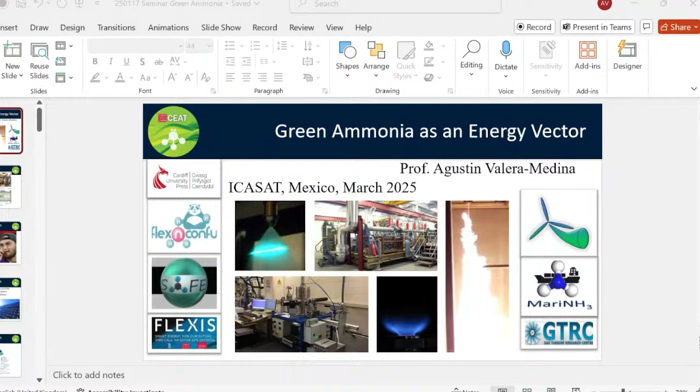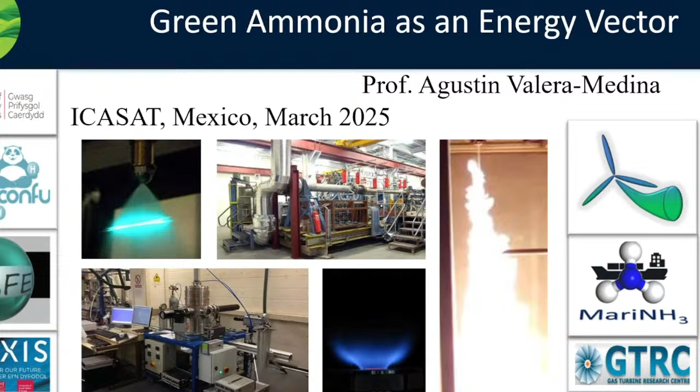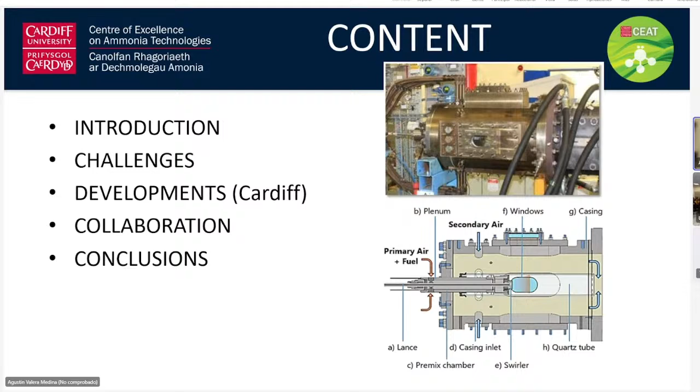Okay, perfect. So I'll start the presentation, and I'll be talking about green ammonia as an energy vector. As mentioned previously in my biography, I've been working a lot on this subject, and we have found that it's a very interesting area that, as mentioned to Gabby, who politely and nicely contacted me a few weeks ago to support this venture, this idea of having these seminars. I told her that it was an interesting concept at the time that we started working on it, and eventually just progressing to something that has reached all the corners of the planet. So as part of the content, I'll be mentioning the introduction, the challenges that we face, developments that we have been doing on the subject, and then collaborations with some conclusions regarding the use of this interesting chemical for its power and energy associates.

So this is in a nutshell some of my biography. For those that want to read, go ahead. But the idea is that I can use this time to mention something about the subject on its own and how it reached our university at the end of 2013, before Christmas. We had some people from Siemens coming over and saying, we want to burn ammonia. We didn't understand what they were trying to do. We've been working on combustion in my university, Cardiff, for around 40 years now. And we have some pedigree on combustion systems, but we never thought about burning ammonia.

And when I started digging out some information about the use of this chemical, I found out that at some point in the last century, some companies and institutions were actually trying to burn ammonia and progress from fossil fuels to net zero vectors like this one. But interestingly, one of the main problems was that the emissions, the lack of efficiencies, and some other factors led to the stop and finish of these programs. It resumed at the beginning of 2000, and by 2010-12, the Japanese started working on this concept, and now we have institutions all across the world working on it.

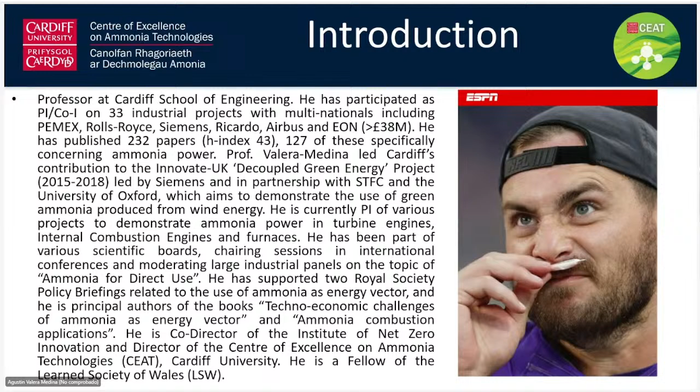We know about industries, large clusters actually trying to use it in China, Japan, South Korea. The marine industry is moving in that direction, so it's forecast now that 1/3 of all marine vessels worldwide in the next 15 years will be operating with ammonia, and in the same way turbines and other large power systems, medium-sized and small-scale units will be using the vector in different locations. So again, very promising, and it was just a combination between luck and the hard work that we have put on this area that has allowed us to reach this level of expertise.

So with that, everything comes down to why we want to use ammonia, and it goes to then using these renewable sources that we have been talking about for the last 20, 30 years. Those include marine, wind, and solar. And as probably all of you know, we have lots of issues regarding intermittency.

Just in the UK, we had around 5 years ago this main issue that because we were running that particular day at around 48% wind power, then the wind stopped. There were some issues regarding weather in the north of Scotland, and from there we just stopped producing that energy. So around 1 million people lost power during those couple of days.

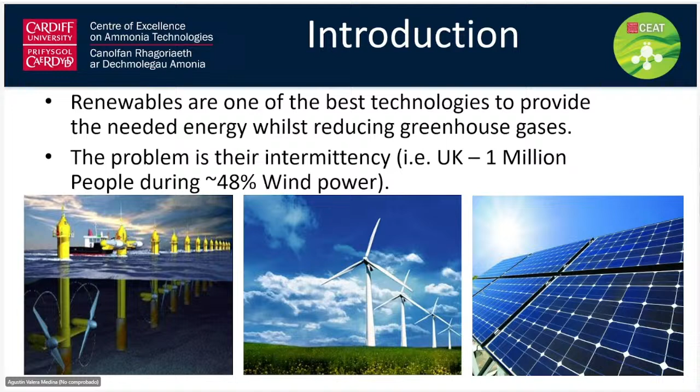Similarly, something happened in Australia where they were just fitting and charging some batteries in the south region of the country, and eventually they suffered a problem with the batteries and also the feeding of that energy, and an entire city lost its power for a few hours. Again, this raises the importance of having some way of actually storing some of that energy.

This is a graph that was produced a few years back by Siemens, and what they did was to evaluate different vectors, different methods to actually store energy. Probably you've seen many, like those related to batteries. We have flywheel storage, supercapacitors that at the time were just moving into early commercial stages, pumped hydro, and some thermomechanical storage as well, like compressed air in caves and some other locations.

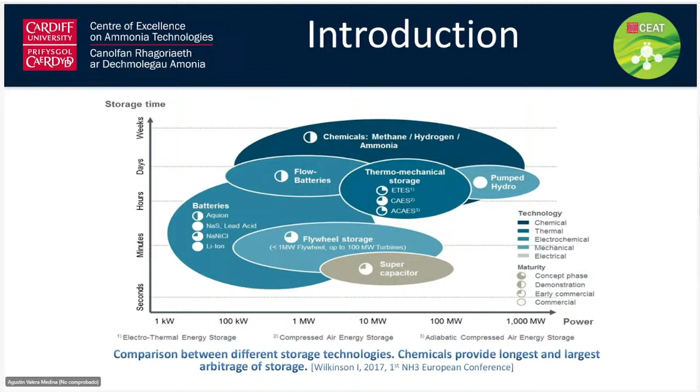But the one that is very promising, that we have been using for centuries, even millennia, and has always been on our agenda, is chemicals. With that, we have natural gas, mainly methane, 90%, hydrogen, which has been in the scope of research over the last 30 years, and then ammonia, which we've been looking into for around 10, 12 years, with a lot of scope and a lot of industrial push to get it going.

So this is an interesting map and also some techno-economic analysis performed by the Hydrogen Council. What they're concerned about is how hydrogen could be moved around from locations where we will have massive production of renewable energy, tapping into it to produce hydrogen. And what do we do? We can then move it to those locations where we're going to be needing it and using it the most. So they are putting some cases like Chile to the US, Saudi Arabia to the European Union,

and Australia to Japan. Along those lines, you can see on the left-hand side that we have all these photovoltaic and wind resources spread all around the globe, compared to the natural gas resources that are very localized and now are in depletion mode.

So with that, the Hydrogen Council said, if we have a place like Chile where we're going to produce lots of wind and solar power, then hydrogen being produced and delivered to the US, if we compare ammonia, liquefied hydrogen, and liquid organic hydrogen carriers, we need to analyze the cost from clean production to the final ports where we're going to be distributing this chemical. You can see on the right-hand side that the cost at port is fairly the same between ammonia, liquefied hydrogen, and liquid organic hydrogen carriers.

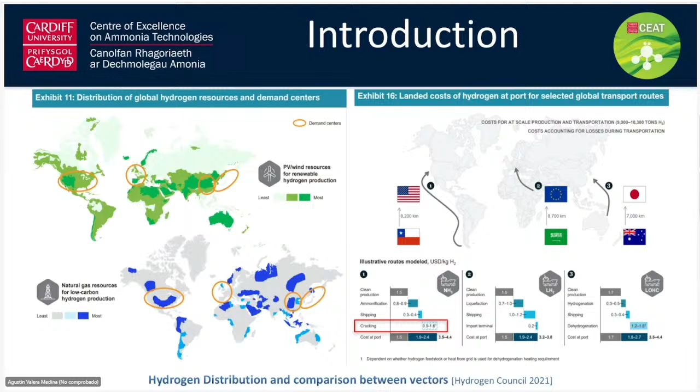But there's one catch, because with ammonia, cracking is almost a third of that cost. So what that means is that if we can reduce the cracking of the ammonia, we will have the best and most economic solution to deliver all that energy, making ammonia a perfect case for long distance distribution, for long storage, and also, as you'll see, heavy duty workloads. So with that, ammonia can be recovered from renewable energies.

We can also use stranded resources like islands or very far away off-grid locations, enable the use of waste streams because we can recover things from farms or processes that have lots of nitrogen and ammonia in them, allow storage of vast amounts of energy, and it can be much cheaper than the use of hydrogen as we know it right now. It can be used to produce energy in these isolated locations, and be employed not only as a fertilizer, which is the main use of ammonia, but also as a fuel.

And one of the interesting things is that the hydrogen content inside the ammonia molecule is actually more than the one that you will have in the hydrogen molecule.

And the reason is that you've got 3 atoms of hydrogen in the ammonia molecule, therefore around 20 to 35% more hydrogen in ammonia than in hydrogen itself. And there's a massive infrastructure with a market that is almost worth 200 billion euros per year, because it's the second most commercialized chemical worldwide. And that makes ammonia a fantastic case to distribute that hydrogen and then provide for some

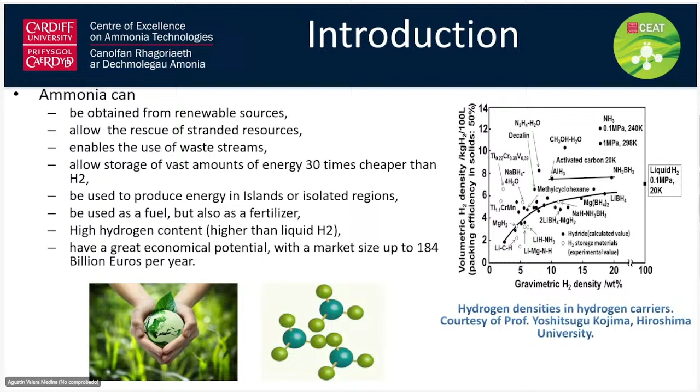of that energy. One of the questions that I always get is, okay, so we are going to produce all this ammonia, but then what is going to happen with the fertilizers that we're now producing? Are they going to get compromised in the production of this ammonia energy? Well, different companies are now looking into different technologies and the transition through all these different generations of systems.

The main challenge and problem with that is that we are producing lots of CO2 that eventually is just dumped into the atmosphere, contributing between 3 to 4% of the total human CO2 production that civilization is producing nowadays. So it's a massive contributor to climate change.

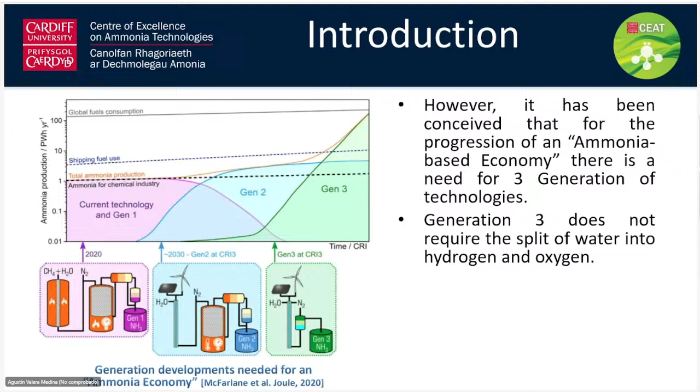Therefore, companies are looking into generation 2, which appears in this graph in blue, and is using renewable energy to produce via electrolysis the hydrogen that will then mix with the nitrogen from the atmosphere, then put it into these reactors. And then one that has the potential of actually changing the world, and probably the next Nobel Prize, would be Generation 3.

Generation 3 is a combination of surface catalysis and materials in cells, fuel cells that are going to use the renewable energy to mix water and nitrogen straight from the air, so without having to separate it, and then finally producing the ammonia.

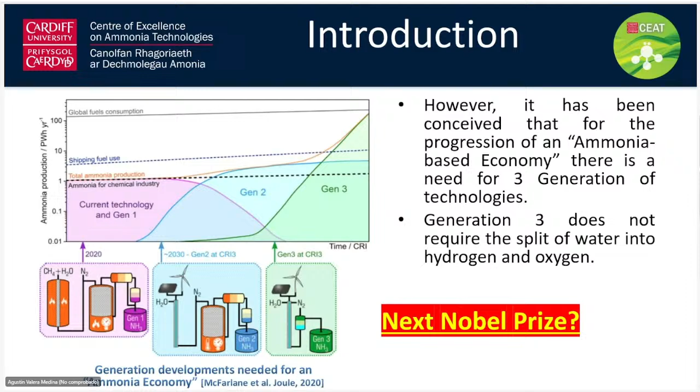If that happens at some point in the near or long future, what that means is that anyone that has renewable energy, which, as we've seen in the previous map, is almost every corner of the planet, and water and air available, will be able to store that energy in the form of ammonia. So therefore, it will drastically change the whole concept of how we produce, store, and distribute energy worldwide.

Another interesting way to produce that ammonia is called pink ammonia production, which is looking into the use of thorium reactors via nuclear energy. And this is an interesting concept because these nuclear reactors are very small, the size of a classroom. And with that, they intend to produce around 100 megawatts per container, and by piling them up, we'll get gigawatts of power that will produce lots of heat that can be employed for ammonia.

Ammonia that will be distributed via shipping and containers, and that way decentralize the production of energy in these isolated locations. So a combination of nuclear and ammonia is now in the cards of every company that is thinking about producing ammonia for the near future.

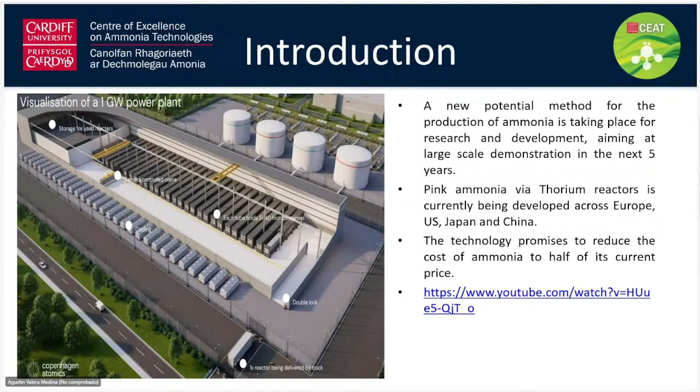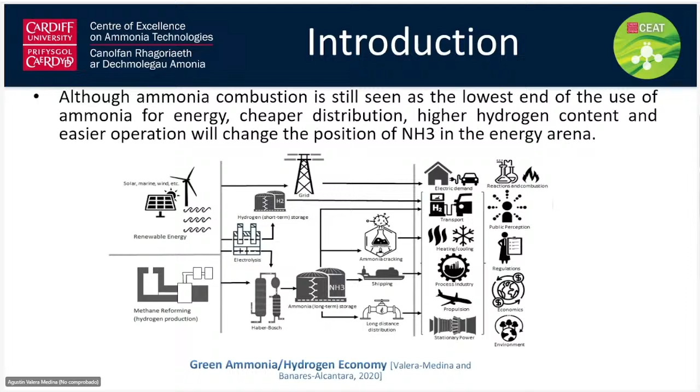The only one that we've got at the moment is one from the IMO, which is a technical specification and some ideas to start using it in the shipping industry. Then the economics involved with that, and finally the environmental aspects that will come, thus dumping all the water and nitrogen from the process that we're producing, as well as with the combustion or use of ammonia.

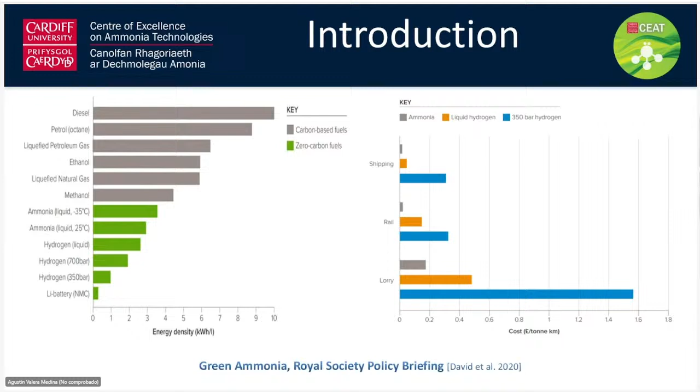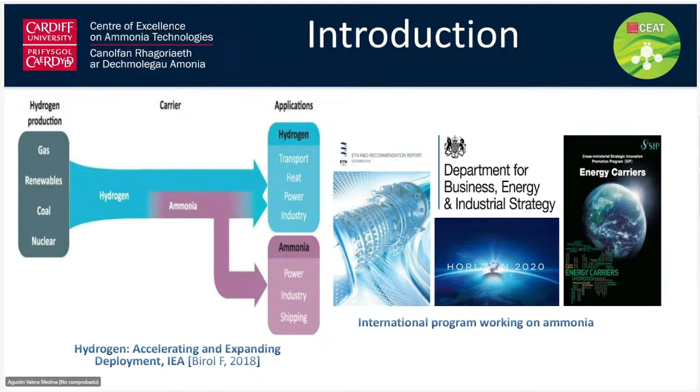And that was something that the International Energy Agency realized in 2018. So they put ammonia as part of the energy applications that the chemical could provide for the power industry and shipping. And then after that, lots of different institutions and governmental bodies across Europe, Asia, and also here, for example, in the UK, started realizing the potential of using ammonia, with many funds and large programs that are now running at different scales.

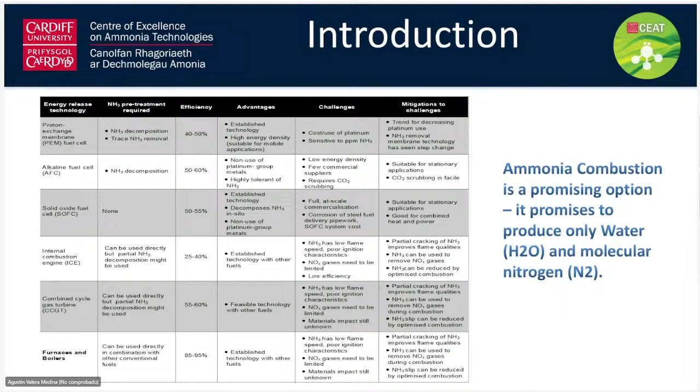So with that, ammonia can be used in all these systems that you see here, from fuel cells in PEM, alkaline or solid oxide, internal combustion engines, combined cycles using gas turbines and some other bottoming systems, and then furnaces and boilers, at all these different efficiencies, running from 25-40 to around 85-95% that you can recover from the use of the chemical. All have challenges, all require some mitigation, some advanced research and innovation in terms of engineering and technology, but all are feasible and possible at their capacities, with lots of research going on now in this arena.

And in terms of what is going on in different locations, particularly Mexico, a recent report produced by Ricardo and EDF, the Environmental Defense Fund, looked into the potential of Mexico to actually become one of these ammonia suppliers worldwide that can provide the fuel itself. And what they found was that Mexico has an amazing potential because of its ports and its renewable energy sources to produce all that amount of chemical and then supply places like the US with ammonia from renewable sources.

Similarly, and not that long ago, just 3-4 weeks ago, we heard in the news that the Istmo de Tehuantepec was receiving a new company called Helax, and what they are going to do is produce ammonia for fueling and shipping applications. So now companies are establishing themselves in Mexico to tap into renewable sources produced in the region, and then with that produce ammonia and hydrogen that will be used for shipping and power applications. So this is coming to Mexico and is coming across all the world, especially Asia, Japan, China, South Korea, that are leading this subject very strongly to decarbonize their systems.

So we got lots of challenges. We have identified 4 that are particular to these technologies. First, the synthesis of carbon-free ammonia. The second one is production of energy at power utility scale. We have public acceptance, which is a major issue that requires safe regulations and community engagement. And then finally, the economics, which need to be right before we can start tapping and producing all this ammonia for fueling applications.

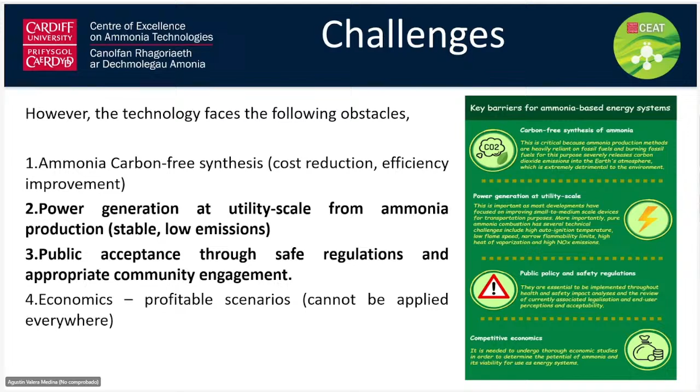So along those lines, some of the things and developments that we have done, we focus, as you've seen in my biography, on the area of combustion, looking into what would happen if we change some ammonia by hydrogen or hydrogen by ammonia in flame profiles. And this is important because once we start doing the switch between hydrogen and ammonia, then we experience different patterns of the final flame that could be good in some cases, could be very bad in some others.

So just as an example, you have this figure where you have different contents of hydrogen from 20%, 0.2, to 100% hydrogen, and different pressures that we were testing inside of a chamber. And as you can see, once we start increasing the pressure and the amount of hydrogen, you have all these wrinkles that appear at the flame front. Those wrinkles are instabilities that are really bad for combustion systems.

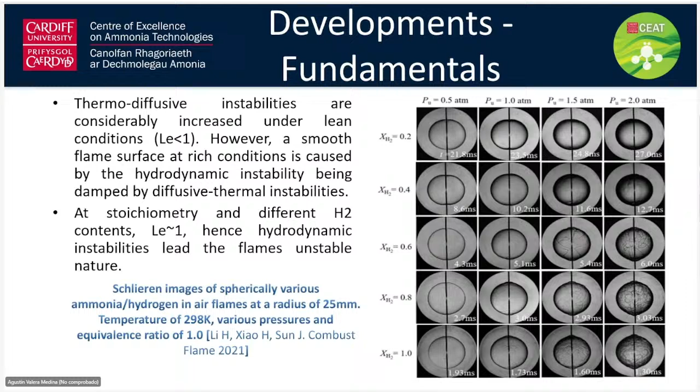So what that means is that if we increase the pressure using pure hydrogen, as you would expect in the new gas turbine systems that have been promised by lots of companies, you will start getting these instabilities at the flame front, producing very nasty effects that can potentially lead to the loss of the flame and explosions inside of the gas turbine components.

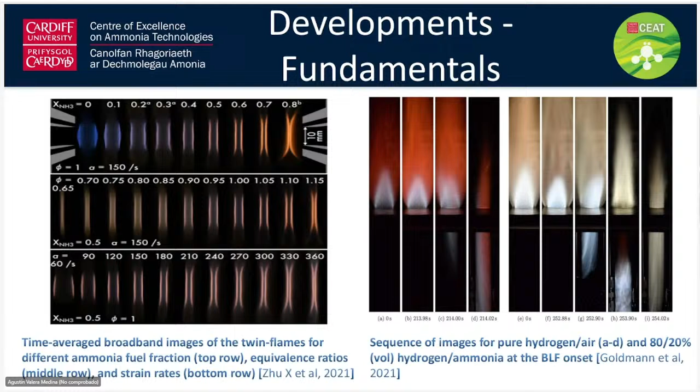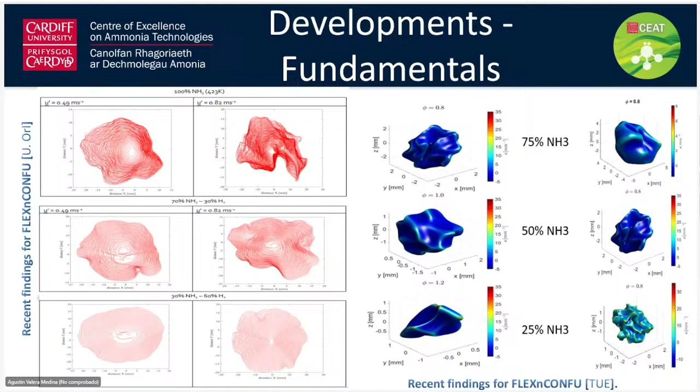So by direct numerical simulations, what we have been doing with some of our partners is looking into the effect of changing that hydrogen content at different air conditions. And as you can see, as we increase the amount of hydrogen, therefore less ammonia, 25% ammonia means that 75% hydrogen has been used for that test, we get all those wrinkles appearing at the flame front. Again, nasty if we put them into an internal combustion engine.

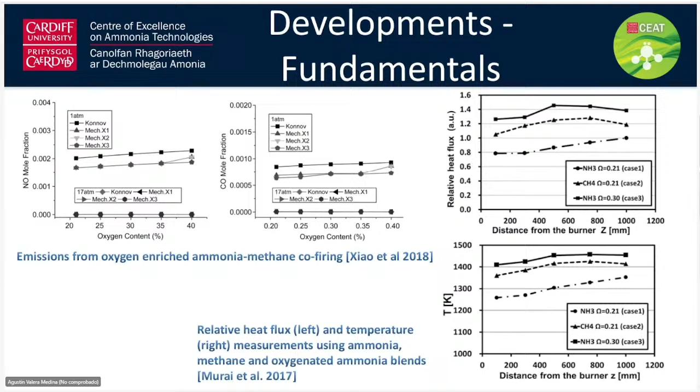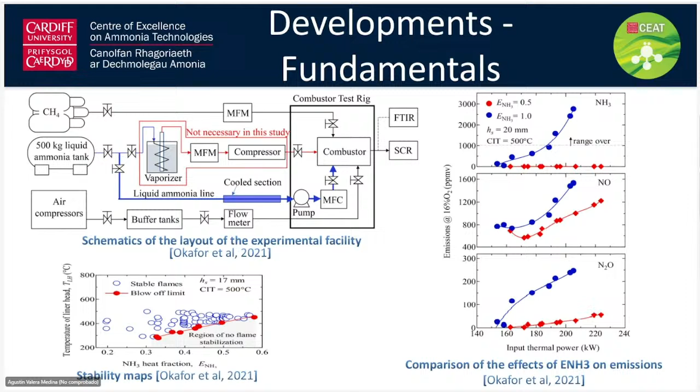Some of the work that has been going on in Japan, and this is very much at the forefront, state of the art in terms of ammonia, is the injection of the chemical via liquid injection without using any gasification. And this particular set of experiments is for a company called IHI. IHI is one of the biggest manufacturers in Japan, and what they were trying to do is produce gas turbines that will operate solely with ammonia, using these injection streams to produce these patterns and avoid the vaporization of the chemical.

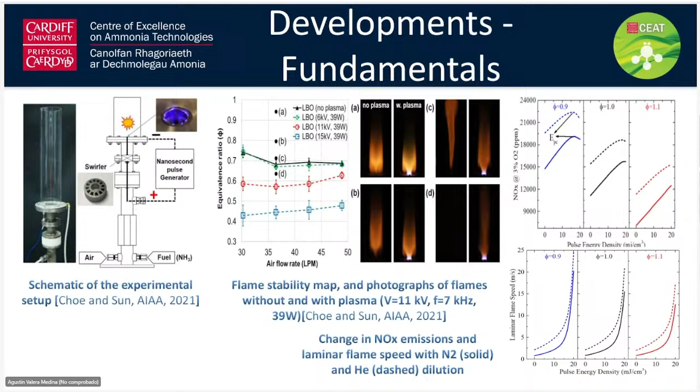Another area that we're exploring that is fascinating is the use of plasmas, plasmas that can be imposed on these combustion systems. And one of the things that is happening is that once we create the plasma, around 3 to 5% of the energy coming from the flame, then we improve the radical formation and therefore the stabilization of the flame. Another thing that we are finding is that we can reduce emissions coming from the flame by using plasmas. And different types of plasmas can then be used in the future for even aerospace applications.

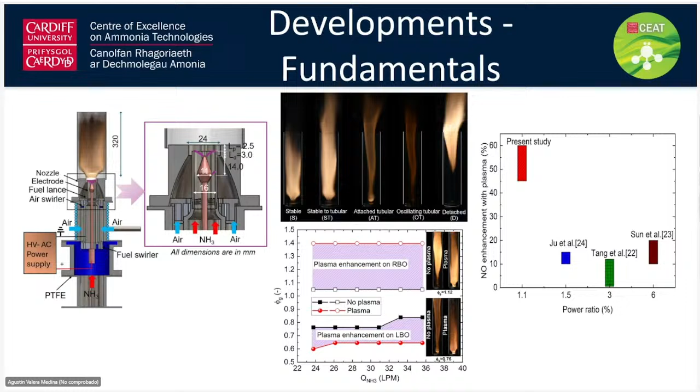So this is some of the work that we have been doing. We have looked into the reduction of emissions. We have been developing our own burners, and all these profiles are already in the public domain, showing how the use of our plasmas is actually producing a much better profile of these types of flames.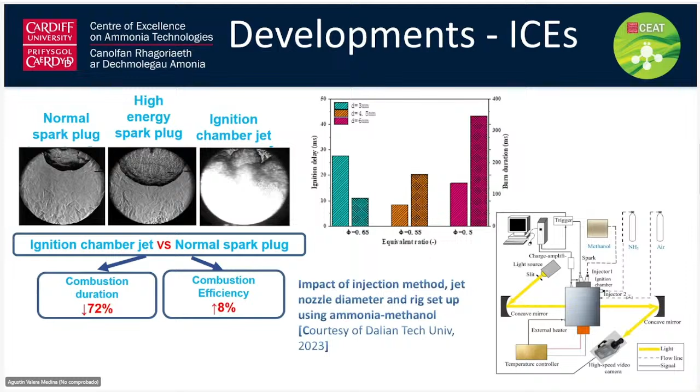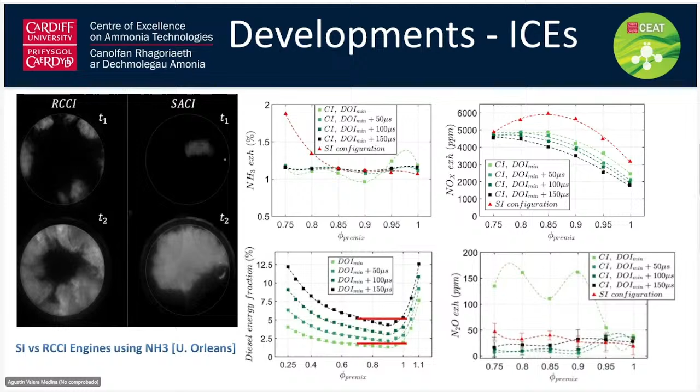So that's the reason there's a lot of research going on trying to normalize some of these tests, so eventually someone comes up with a final solution, or a solution that is as approachable as possible to engineering applications that can be used for general purposes worldwide. Some of the ideas regarding the use of spark ignition, versus reactivity controlled compression ignition systems, are in line with these thoughts, to produce something that is stable and that can reduce the emissions produced by such systems.

When it comes to boilers and furnaces, we do have a lot of work going on. These are just two systems that you can see, three actually. One is being used for refineries and oil systems that uses ammonia, which it recovers from these locations, and then produces some extra power for steam production. Steel making: as you can see from the two flames, the blue one is natural gas, the yellow one is based on ammonia. In Japan, for the annealing process and production of steel.

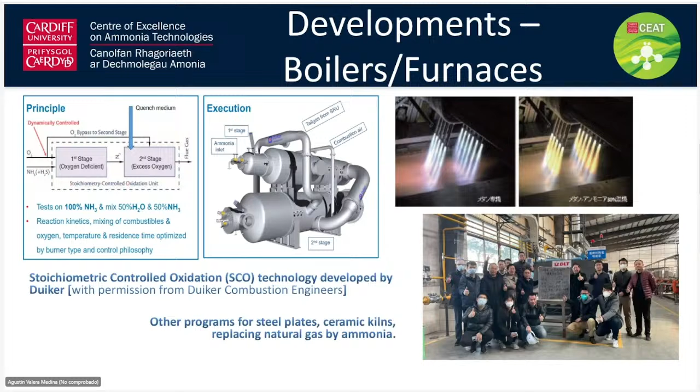And the one that you see on the bottom is the first ceramic tile produced worldwide using purely ammonia. That line that you see there is around 20 meters long. Now China is using a 200 meter long ammonia line to produce tiles using green ammonia, and they're trying to expand it to 200 companies in the region of Guangzhou and Shenzhen.

So with that, we have been working on the idea and principle of replacing LPG here in the UK. Propane is being used in lots of rural locations, and after doing some techno-economic analysis, we have found that the best way to replace LPG would be to use ammonia. And I always get the question, why ammonia if hydrogen is actually being used for ammonia production? Isn't it supposed to be more expensive to use ammonia instead?

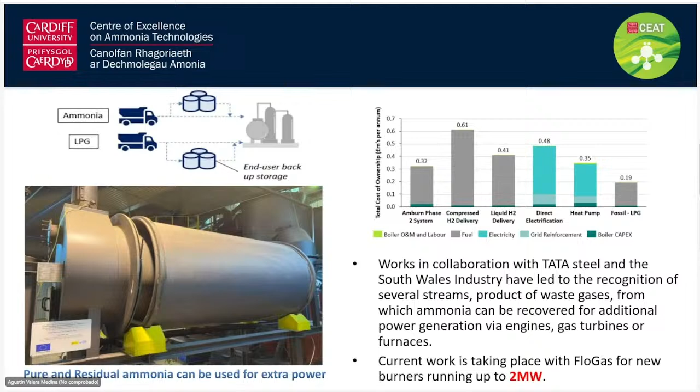But the answer is that if we were bringing hydrogen containers, we would need many more hydrogen containers than those we require for ammonia to provide the same energy. Therefore, the use of ammonia is superior in these types of locations to the use of hydrogen itself, plus all the requirements that have to do with health and safety.

Along those lines, the use of ammonia in coal power plants is going ahead. There is now news about using it in Japan and in China, where it is proliferating extremely fast because they have a very big program of around $500 million dedicated to research on ammonia technologies for decarbonization of coal power plants. It's going on in South Korea, Malaysia, Thailand, and now also in India and Indonesia. So the proliferation of these replacement technologies based on ammonia is going ahead.

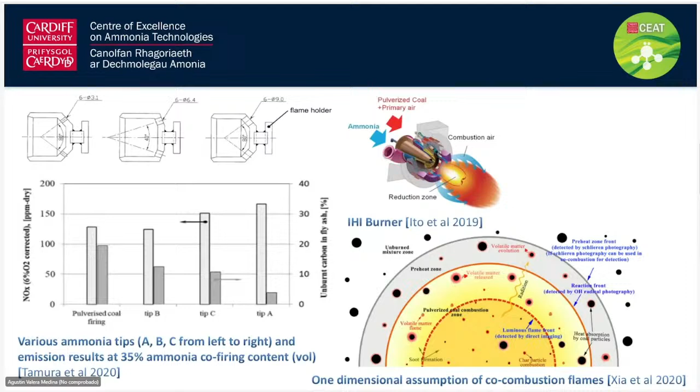And as I mentioned, one of the interesting aspects is that once you start changing some bits of the technology, as you can see here on the left-hand side, just the angle will be enough to increase or decrease the amount of emissions that you get from these systems, which is a big challenge in terms of engineering, but a fascinating area to do research on.

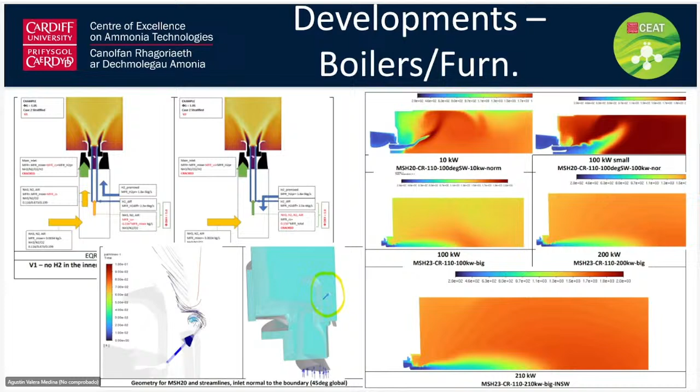As part of that, the CFD modeling that we have been doing has allowed us to develop our own burner, and with that, try systems that go up to 1 megawatt power in boiler applications. The one that you see at the very bottom is a furnace that can go up to 3.5 megawatts. We are running it at half a megawatt. And the boiler that you see on the left-hand side will operate at 1 megawatt power using ammonia solely.

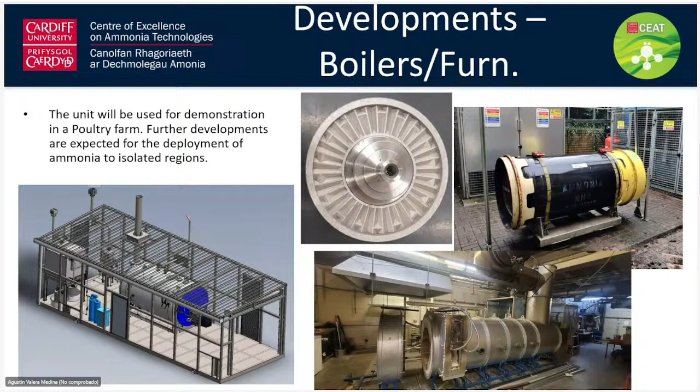So you see the ammonia drum that we got is half a ton, and that one provides energy for at least a week and a half for that same unit, which is, again, pretty good. And as part of that, we have been doing works on the use of novel materials. Catalysis is going to be a major one because we believe that you require some hydrogen that can be obtained actually from the ammonia itself.

So we partially crack or decompose the ammonia, then what will happen is that we'll produce some of that hydrogen that will improve our ammonia combustion. In the same way, we are testing different materials to do this cracking. We are testing what would happen inside of the combustion chambers in terms of instabilities. We also evaluate what is the radiation.

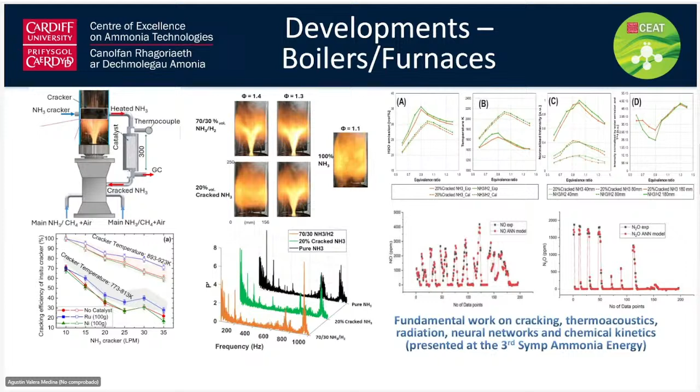And now another area that we are using is artificial intelligence and machine learning. With artificial intelligence and machine learning, what we are doing is providing some new controllers that are going to then feed into these units to then determine what is the right amount of ammonia and hydrogen that we require. And then based on the visualization of the flames, we can determine what is the oxygen-fuel content and therefore control it.

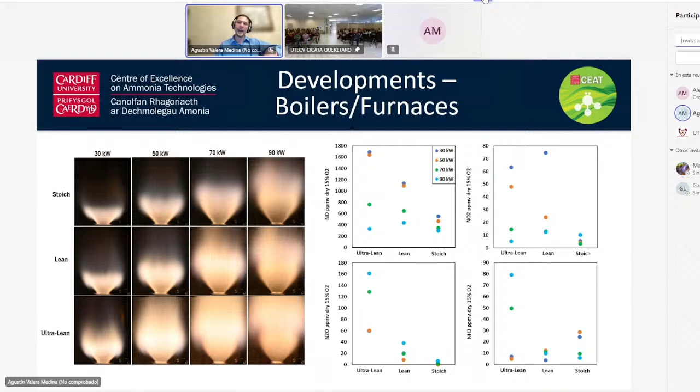Now you have some increase in the traces of what is the unburned ammonia, but again, in parts per million it is negligible compared to the hundreds of NO that you have reduced. Because ammonia is a natural deNOxing agent that is being used in power stations and also other systems. So finding the right combination and right amount of ammonia and nitrogen oxides is what is needed for these systems.

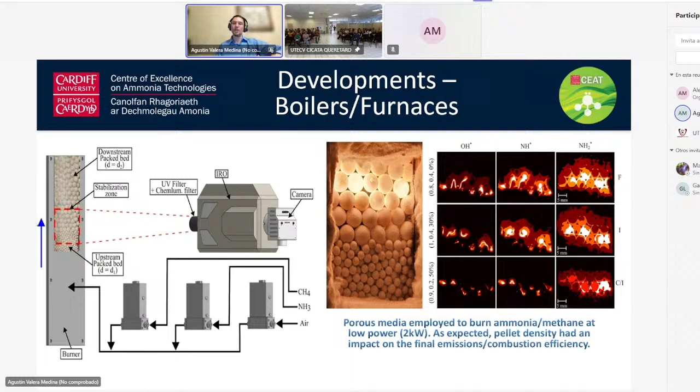So along those lines, we have different systems related to large power boilers and furnace applications. We're now looking into the use of small systems as well, pellet-based, and with materials and catalytic converters to provide energy at low power. Thinking about domestic appliances, around 1 to 2 kilowatts power that could potentially be fed using ammonia, using catalytic materials that decompose the ammonia, produce hydrogen, and then at the same time, by the recombination of NOx, can reduce the NOx at the front of these materials. So that's another area that we have been looking at.

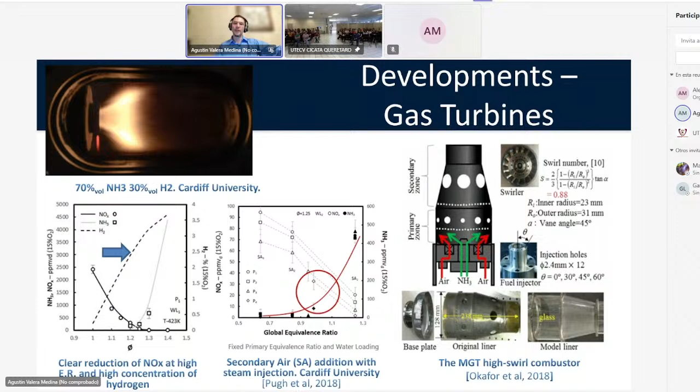Another thing that is very interesting is that we start then producing lots of hydrogen at the flame front. And that's the reason, because in some of these applications, we require a secondary zone that is going to burn only that production of hydrogen. And because hydrogen has been produced in the range of 2 to 5%, it's above the flammability limit. Therefore, we can do the combustion properly.

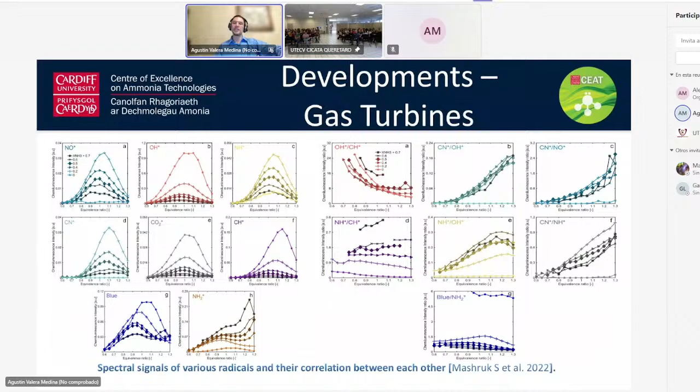Some of the things that we have done as well have to do with the normalization of species, to then find out what is the perfect status of the flame that we are using. And this goes back to the artificial intelligence systems that I was talking about. So one of the things that you see here, depending on the amount of ammonia, you will have different graphs for different radicals. But then once you start normalizing these values, you have some of these trends that are linear, and that can give you a really nice scope of where you are in terms of the amount of oxygen-fuel that you got in the system.

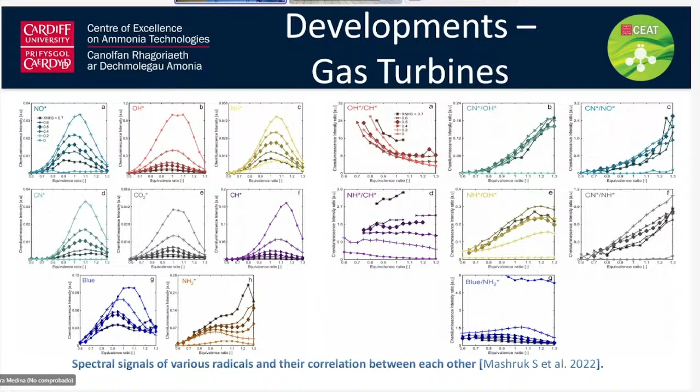So if these can be combined with artificial intelligence and also machine learning from the images being recorded from the flames, you can then have a clever, intelligent controller that can provide the right amount of ammonia that is required in the systems.

Other things that we have been looking at are also material science, material impacts on how we have these changes of the material surface and embrittlement that can happen via hydrogen getting inside of the material. Some of the things have to do as well with nitration at the surface of steels and nickel-based alloys.

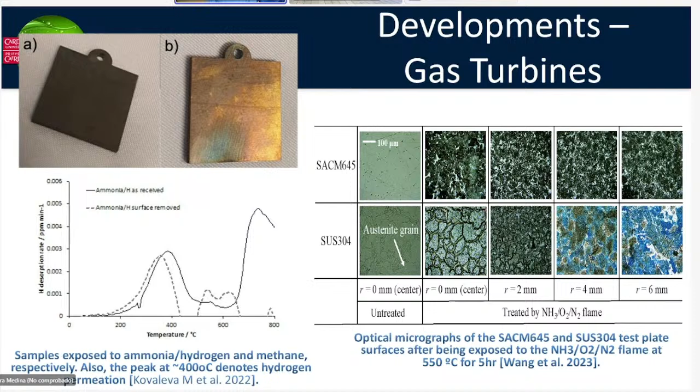On the other side, we got all this steel analysis done by the University of Tokyo. And what you can see is that the untreated materials at the beginning have that different grain and are very stable. And then as they've been exposed to an ammonia oxygenated flame, they have changed entirely in terms of the structure of the material.

Some of the programs that we have are larger scale. We're trying to decarbonize a large power station in Portugal. With that, we are looking into the use and replacement of hydrogen and ammonia inside of a power unit. The interesting thing is that we don't stop the gas turbine. We keep operating it. And then when we are off the grid or at very low power requirements, we use that extra power to produce the ammonia.

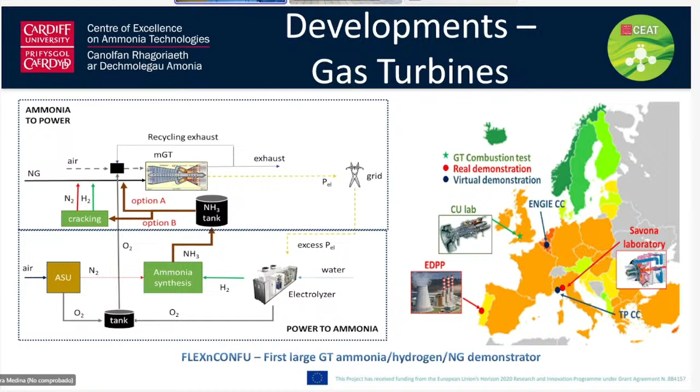And once we are back to peak hour demand, we can then input that ammonia or crack it and produce hydrogen and nitrogen to feed the additional power that is required from the gas turbine. That way we keep the operation ongoing, we reduce the sizing of the gas turbine, and therefore reduce costs at the end of the day.

So with that, we have done some tests and experiments related to this area at different pressures. As you can see, once we start increasing the pressure, we get a reduction of nitrogen oxides. This is an interesting aspect of the technology, because once we have the compression of the flame and also the increase of reactivity, nitrogen oxides tend to decrease.

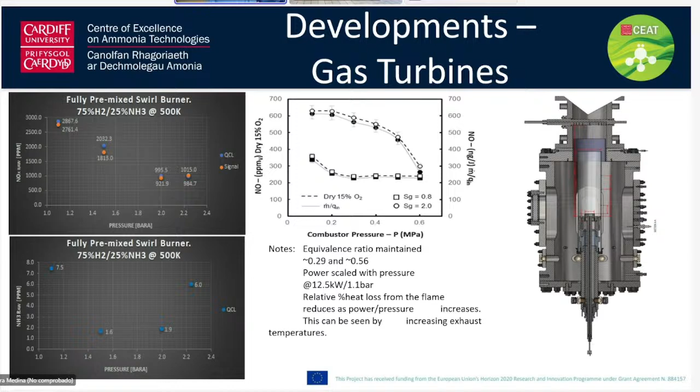Now, there's a point where they start flattening out and remain constant at the same value, but there's a point where they can be reduced drastically, 2 to 3 times, in terms of gas turbine operation. And that's what operators and manufacturers are now looking at for the pressures and systems operating with potentially ammonia hydrogen blends.

Some works that we have done numerically with Baker Hughes are showing that same trend, that as we increase the amount of ammonia inside our blends and change the pressures, we have a drastic reduction in nitrogen oxides coming from these systems. You see here how we had around 1,000 parts per million in this particular system when operating at 1.1 equivalence ratio, slightly past the point of a perfect air fuel combination. And once we increased it further, it was in the range of around just 3 to 10 parts per million.

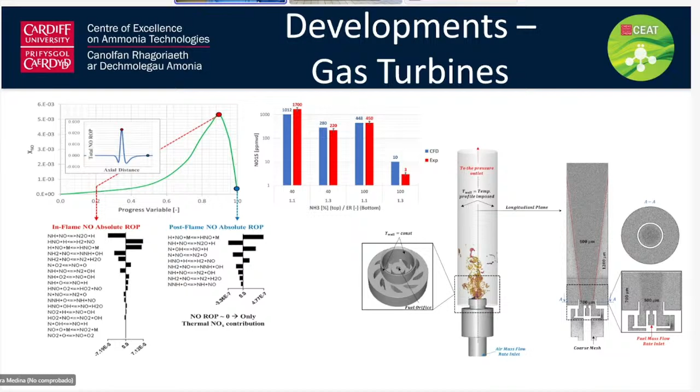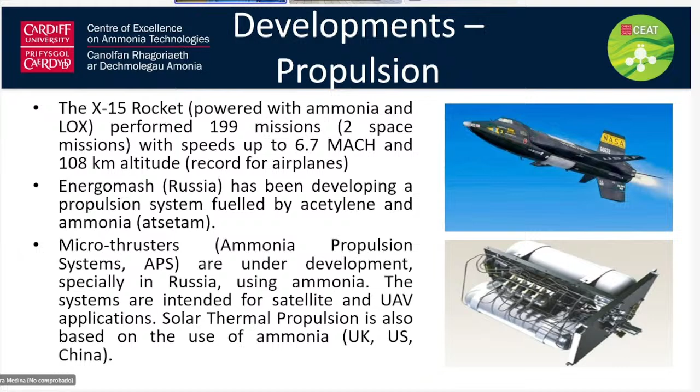Some of the works that we have been doing are in propulsion systems. Ammonia has been used over the years for aerospace applications in the US, where they tried it in oxy-fuel-based systems, in the same way that Russia, China, and other economies like the UK or Europe have been using it in satellites. However, one of the things people are now looking at, going back to Boeing and NASA in collaboration with Florida and Georgia Tech, is evaluating the use of ammonia for air flights and aerospace systems.

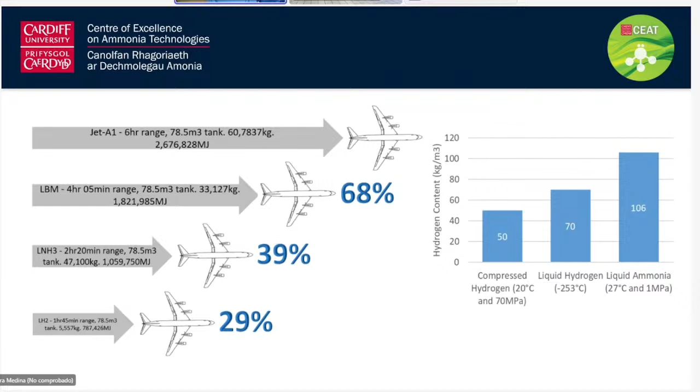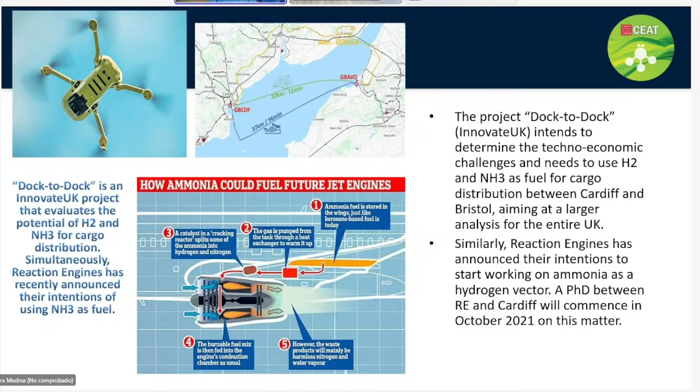and things that have to do with health and safety. However, along those lines, now companies are looking into how to bring ammonia on board, start cracking it or producing some partial cracking, and therefore providing the power that is required in gas turbines, engines, and even fuel cells for aerospace applications.

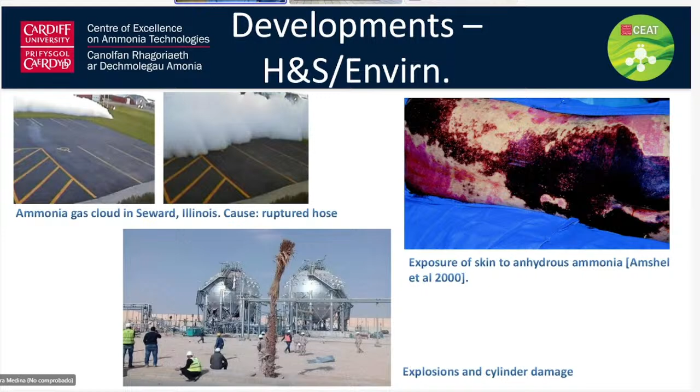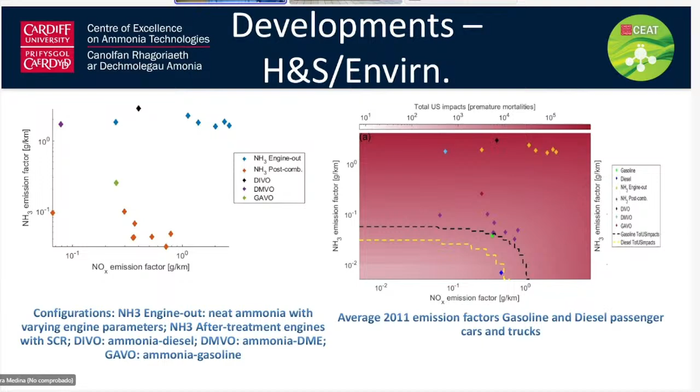Some other work we have done looked into emissions profiles, finding that if we do the right aftertreatment of engines, these engines using ammonia could be even less damaging than those working on gasoline or diesel.

And finally, some work that we have done on public perception. We did it with a PhD student from Mexico, who was brilliant, because we managed to compare the UK and Mexican economies in different locations with different groups, finding out the major problems in public perception of this chemical. And it was very interesting.

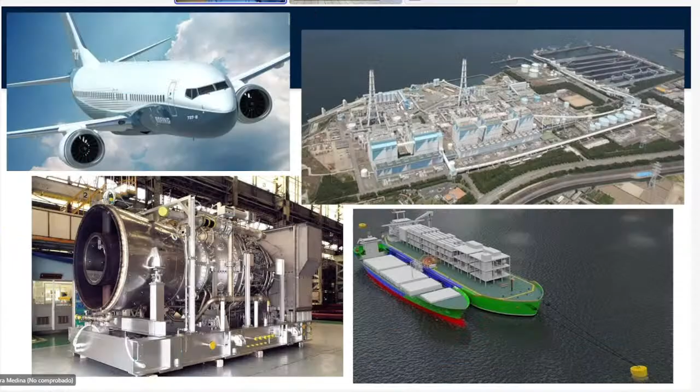So with that, aerospace, power generation, gas turbines, and shipping are now in line to start using ammonia in the next 5 to 10 years. We've got lots of collaborations going on across different countries, including Mexico. And with that, we have produced different books, journals, papers, and modules related to the use of the chemical.

So if anyone's interested in learning more, knowing more about this, please give us a shout, because we believe that finally, again, ammonia can be used to decarbonize cooling, heating, power, and propulsion. It's going to be a system that requires high efficiencies, low NOx emissions, and also the production of species that can be combined to then improve the process itself.

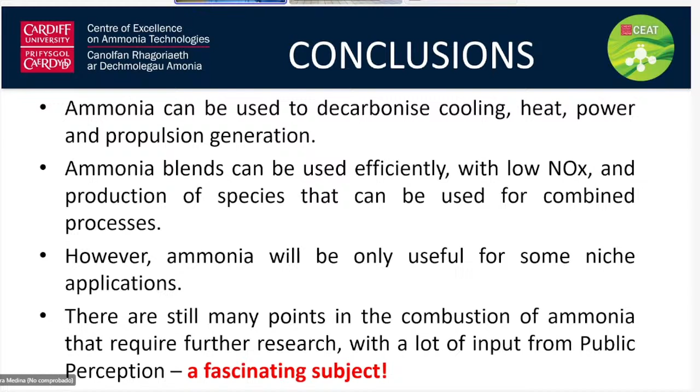So this is my team. This is all my PhD students, researchers, and technicians working in our programs. If anyone's got any question, I'd be happy to answer it.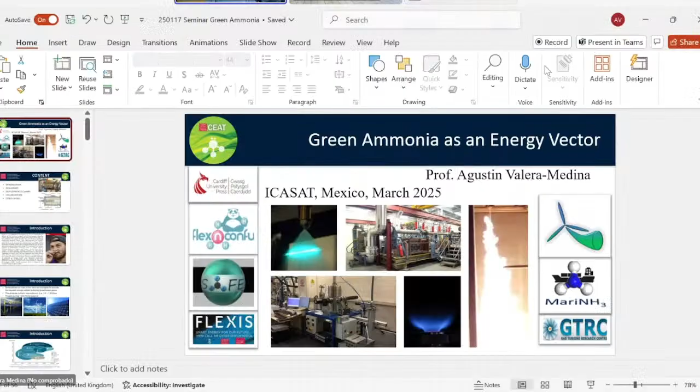Well, thank you very much, Doctor. I wanted to ask you, you're telling us that ammonia can be cracked, and this is the process that you are using. You're changing it into hydrogen and nitrogen. And I wanted to ask you, I think I missed it. I don't know if you are going to be using a co-fuel, or it's just going to be ammonia. No, it's going to be only ammonia.

So the way that we are now operating, and most of the people working around this area, there are now a lot of companies, especially in Germany, UK, China, and Japan, that are trying to work around this topic. And initially, we operate with something that is warming up our cracking systems. So material-based, they tend to be ruthenium, nickel, and now people are talking about cobalt and also molybdenum to use in these combinations that they're putting forward.

And then with that, once we heat it up using, for example, natural gas, propane, or electrical systems, then the ammonia comes in, starts producing hydrogen, and then once we've got the hydrogen out, they can use it either for fuel cells, directly in combustion, or as we are doing it, partially combustion systems.

Okay, thank you very much. Does anybody else have a question?